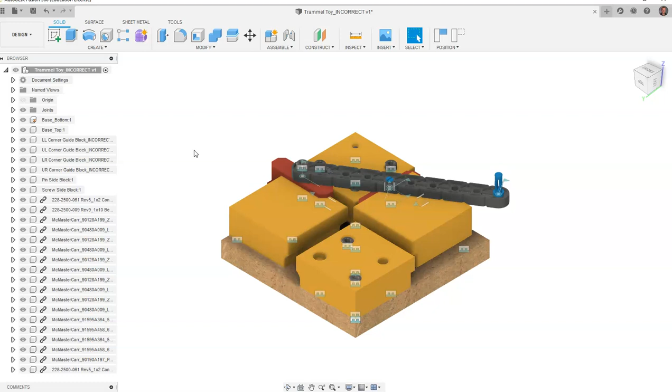In order to go in and start editing parts, we want to turn off the visibility of all our bolts and all our McMaster parts. We see bolts, hexagon nuts, dowel rods, and we want to turn off the visibility of all of those parts. We don't need to see those parts.

We're also going to turn off the visibility of our joints up here at the top, because the only thing I really need to see to edit the part are the corner blocks, and we're also going to be referencing the pin slides. For the sake of how we're going to start, we don't need to see the sliding blocks, so we're going to turn off the visibility of those.

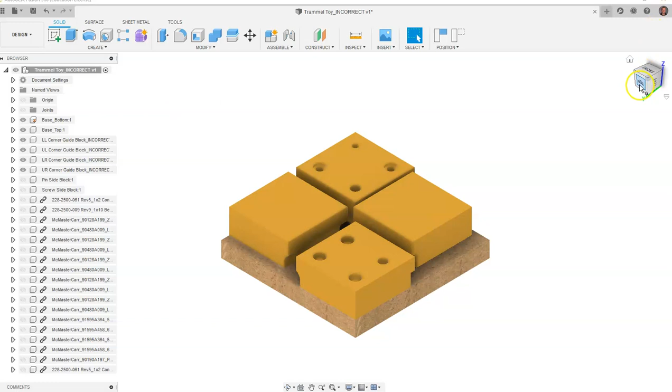We're going to take a look at our objects, and the first object we're going to look at is this corner guide piece right here that we can tell has an issue on the bottom to where it does not touch the bottom. It is perfectly constrained to a rectangular prism void here, but we need to get the bottom of this to come down and touch the object.

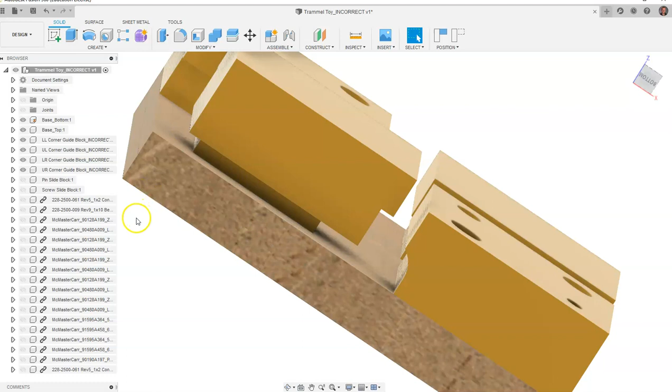So we're going to turn off the visibility of our base top and our base bottom, and turn on the actual object that we see here. I'm just going to drag my mouse over here, and we want to get a hold of the actual piece right here, which is the LL corner guide block, and I'm going to activate that component.

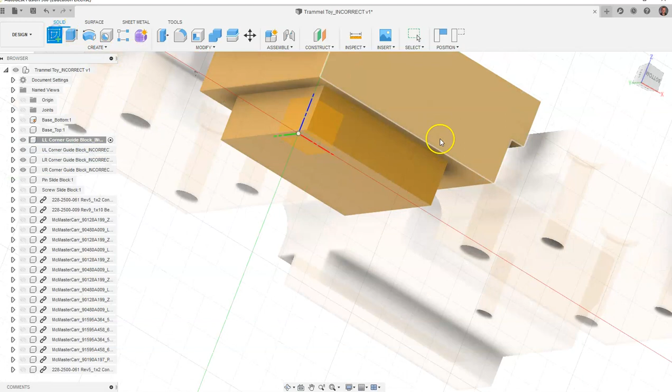We're going to use our view cube, and we want to place a new sketch on the bottom of this piece right here, and I'm going to say capture position. And it's going to flip. I'm going to hit P on my keyboard for project geometry, and I want to project both the large square and the small square, and I'm going to say OK. Then I'm going to go to finish sketch.

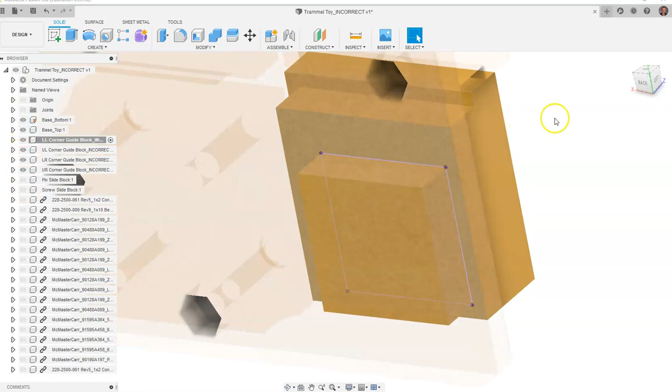We can rotate a little bit here, and I want to go back and turn on the base top and the base bottom because I wanted to be able to see the object that I was with the geometry I was projecting.

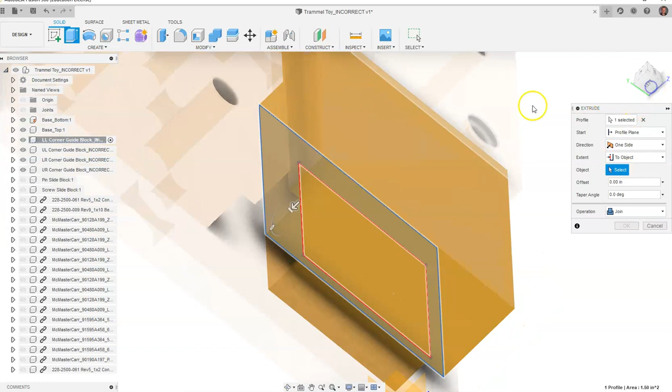Now I'm going to go to extrude, and I only want to extrude this surface here. So I'm going to have to zoom in a little bit, and this is the only surface that I want to extrude. But I want to come over to distance, and I want to go to object, and I'm going to rotate a little bit just to make sure that I can see the very top of this surface right here, because what I'm trying to do is fill in this gap in here.

So when I take a look at the side, I am filling in that gap. We're just going to say OK. And you can see how we've gone in and we've filled in that gap on the bottom now, and it's rested around that smaller square.

We're going to go to sketch again. We're going to click on the side of the object. I'm going to hit P for project geometry. I'm going to tap inside the object. I'm going to go to finish sketch.

I'm going to go to extrude. I'm going to go to distance, and go to object, and we want to go to this outside surface out here. We want to come out and meet the outside surface. I'm going to say OK.

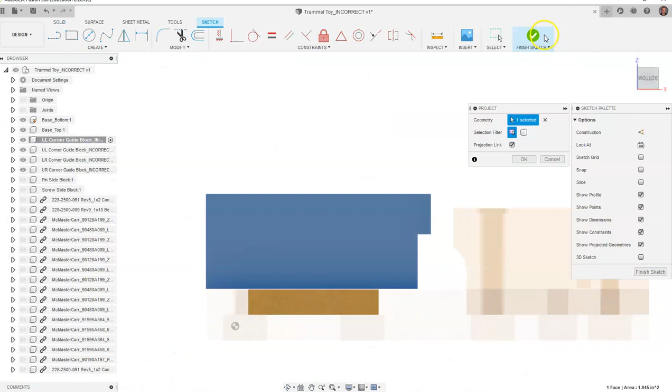We're going to go to sketch again. I'm going to click on this surface, project geometry, this surface. I'm going to finish sketch. I'm going to go to extrude, and I want it to go to an object, and I want it to come out to this outside edge. We're going to have to move our view cube just a little bit so we can see that surface. I want it to come out and meet that edge, and we say OK.

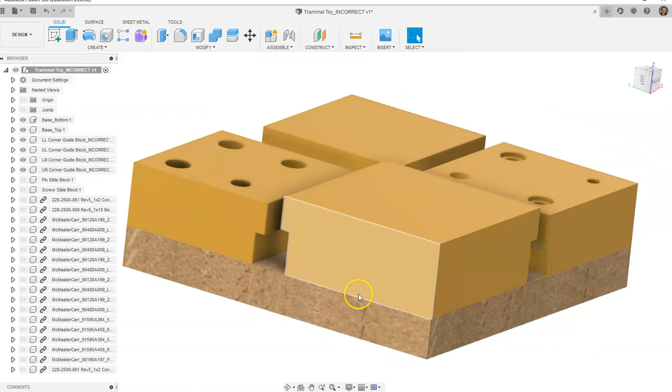Now, if I come back up and I join the larger assembly, you will now see that we have made this part to where it will come out and meet the edges. The other parts are close to meeting that edge.

We only have one other one that doesn't meet that edge. We'll get to that part next. The other issue we have to deal with this specific part is it's raised too high. It is higher than the other three parts. We need to trim off the top of this object.

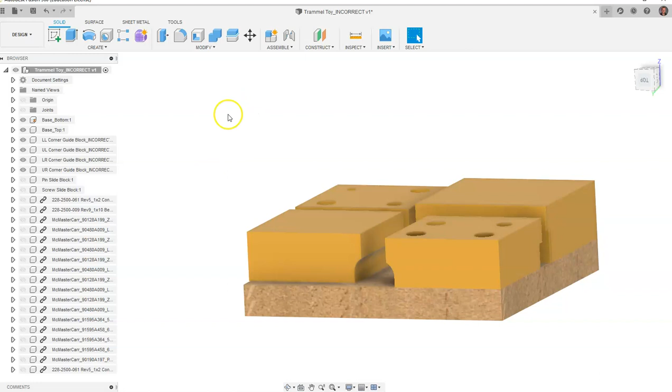So once again, we're going to go to that part, and we're going to activate it. I'm going to go create a sketch, and the surface we want to create a sketch on is right here. That's going to flip around on me. I kind of want to come back around and look at it. Sometimes you have to take your view cube and rotate until we can actually see the surface that we had clicked on. And this is the surface right here.

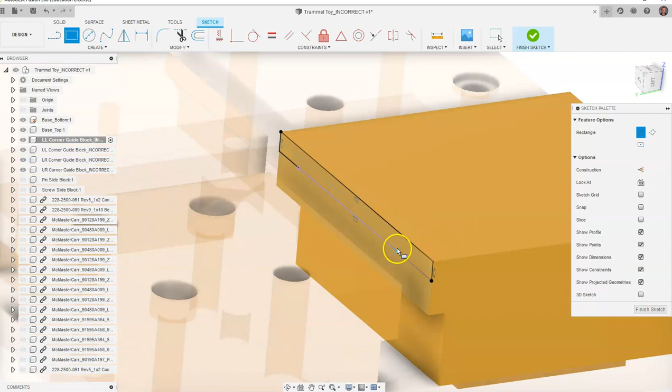I'm going to hit P for project geometry. And what I want to project in this case is this line right here. This line I want to project onto there. I'm going to grab a hold of a 2-point rectangle, and I'm going to click over here, and I'm going to try to snap up here, and it did snap. So what I'm trying to make sure of is that the surface right here that we're getting ready to cut would be coplanar with this surface, and I'll go into more of that in a second.

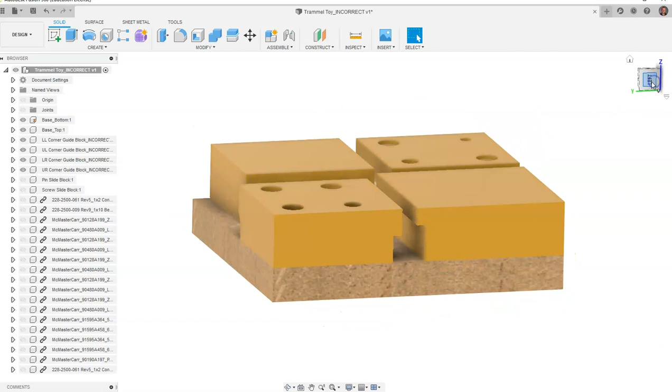We have a rectangle right here. We're going to go to finish sketch, extrude, click inside this rectangle. We're going to drag the opposite direction, and I'm going to go down to all, and I'm going to say OK. I'm going to activate our larger assembly, and you can see what I mean when I mean coplanar. That now is at the same height as the other pieces, all 4 of these are on the same plane. I could set something on top of it and it would be at a perfectly flat angle.

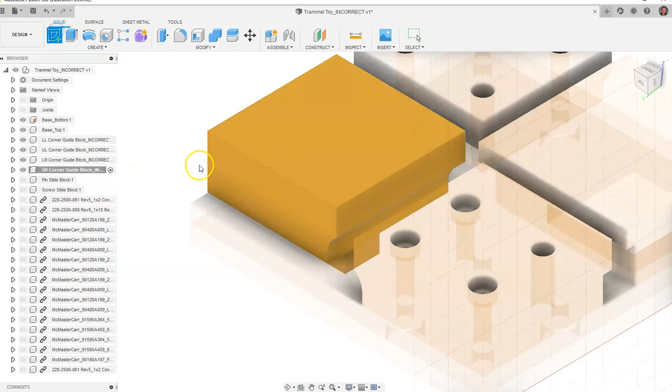Our next object that we have to edit is going to be this surface over here for this part. So we're going to drag over the top of our pieces here, and I'm going to activate this piece. We're going to grab a hold of Create Sketch. We're going to click on this side right here. I'm going to want to come back around again just to make sure I can see it. Hit P for Project Geometry, tap inside my surface, finish my sketch, go to Extrude, and we're going to go

over to Object, click on this surface here. It's going to come right out to that edge. I'm going to activate the larger assembly, and it is now flushed. It is now flush with that edge.

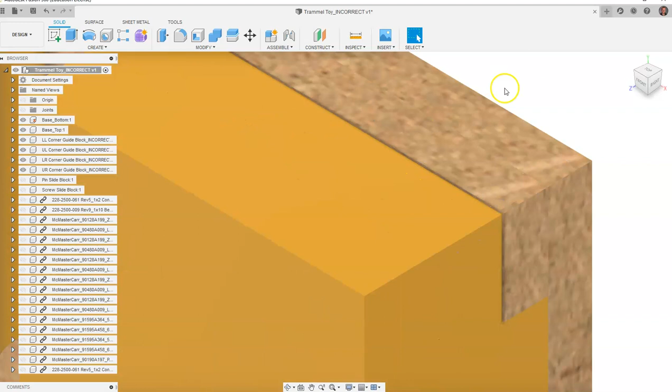If we go around to our 2-dimensional views here, we will see that we have flushed objects. We don't have anything coming out past the edge. We don't have anything that's in like a void. Now everything comes right up to the edge. Everything is constrained. And the only issue we have now is, you know, if I come back over and I

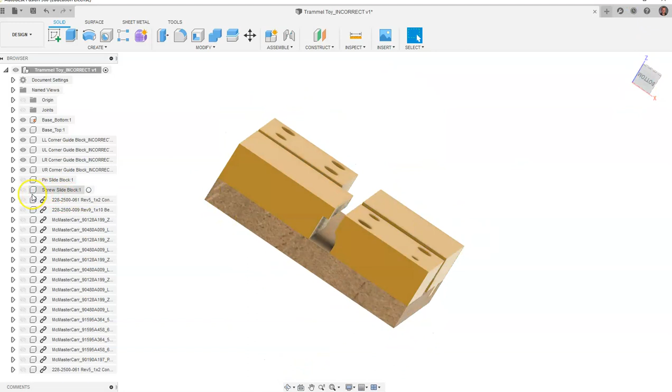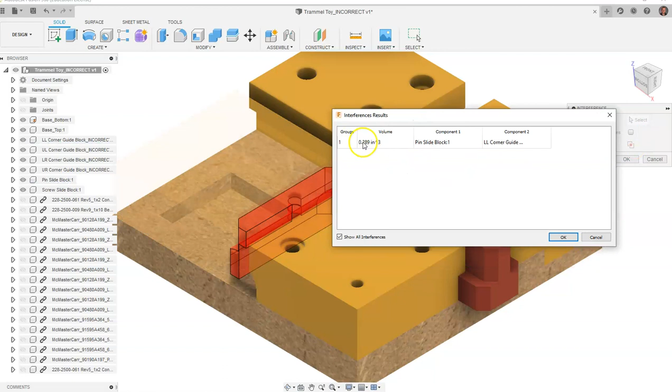turn on our pin slide blocks here, we have a lot of interference going on. And what interference means is that these red sliders are actually inside these gold blocks. And if I came up to inspect and I went to interference, I can click on this red piece and this gold piece and go to compute. And this is how much interference is going on between those two. This is how much volume is taken up by that interference. And I'm going to say OK.

So the issue that we have is we want these 2 pieces to be able to slide down through the object without any interference at all. It would be physically impossible for these things to move through because they're actually going into objects. We're going to do some things that will fix that.

So I'm going to turn off the visibility of our pin slide blocks. And I'm going to come around. And we're not going to go into any specific parts. We're just going to kind of stay in the larger assembly. And I'm going to come up to Create Sketch. And I'm going to click on one of these sides. I'm going to say Capture Position.

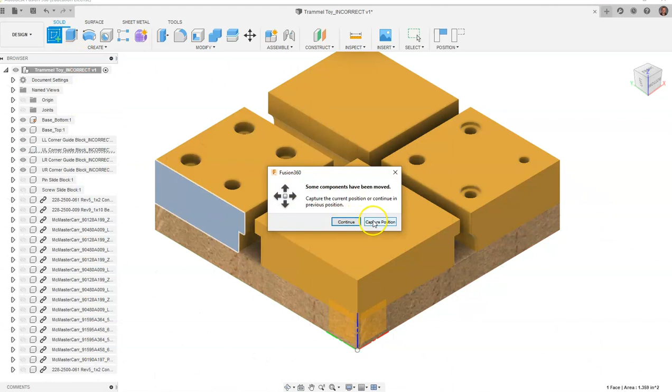And I'm going to hit P for Project Geometry. And what I want to do is I want to come in here and click on every one of these lines. It might be even easier for us if we were just a little bit more of an isometric view, maybe from this corner, something like that, to where I can say, no, I want to come in here and grab a hold of every one of these lines that I can get my hands on.

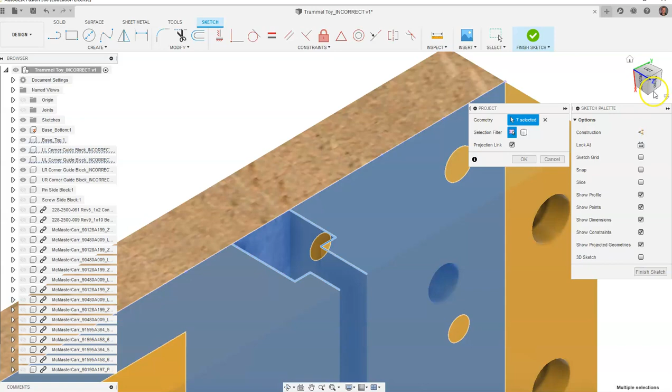Let me see if I can come around and make this a little bit easier to see. I just want to get a hold of those things. I have 7 total things selected, and I'm going to say OK there.

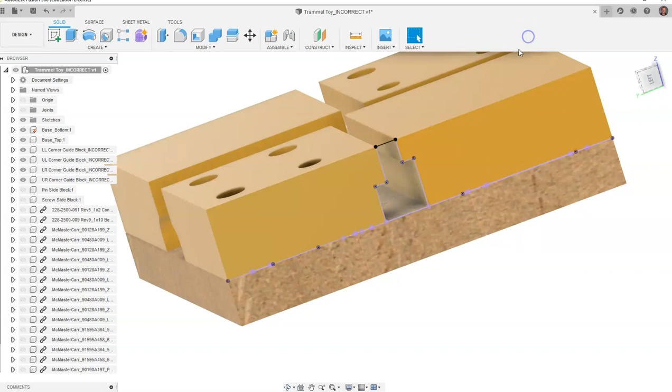Now I need to close off this profile by clicking from here to here because I didn't project anything up there on top. I do now have this surface created over here on the side, and I'm going to go to Finish Sketch.

I'm going to go to Extrude, and click inside that surface. I want to drag all the way through this object, but for distance I want to say to object, and I'm going to come over here on the other side and click here. But I don't want to cut, I want to join. I want to fill that in like I'm filling it in with Play-Doh, and I'm going to say OK.

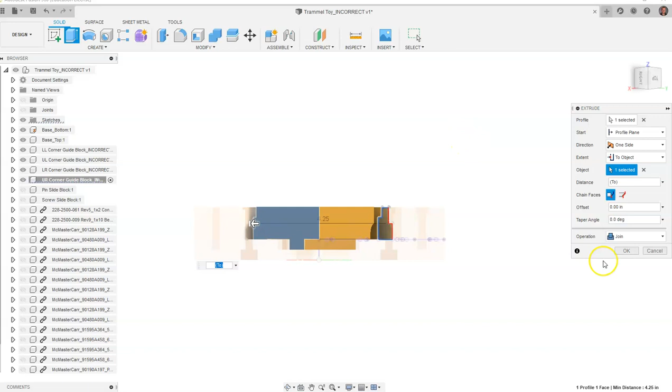And when I come back around to the other side, you're going to see this is flat. You see a little bit of an edge in here because of what we've created. It looks like that one's a little bit elevated. Maybe I clicked on something over here, or maybe I messed up with where I clicked.

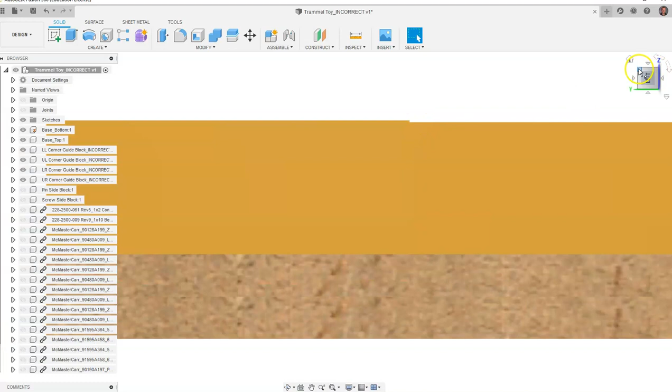But just for the sake of the video and the discussion, you can see how we've made this and how it lines up. Maybe I can come back, it looks like maybe I have a ridge here that I need to fix. Maybe I cut off a little bit too much over here, but we can always go back and fix that. To the other side, I'm going to grab a hold of my sketch.

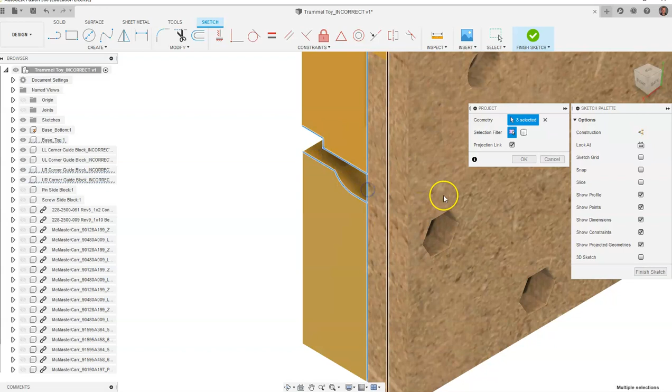I'm going to come in here. I want to come up to the top right when we take a look at this. P for Project Geometry, I'm going to go ahead and project. I'm going to go ahead and project these lines. Let's go ahead and project down here. It looks like I do have that nice and lined up.

I do need to grab a hold of my pencil. I'm going to come into here and I'm going to play. Oh, it looks like that's at a weird angle there, doesn't it? It looks like it is raised up a little bit. It's not really going to hurt.

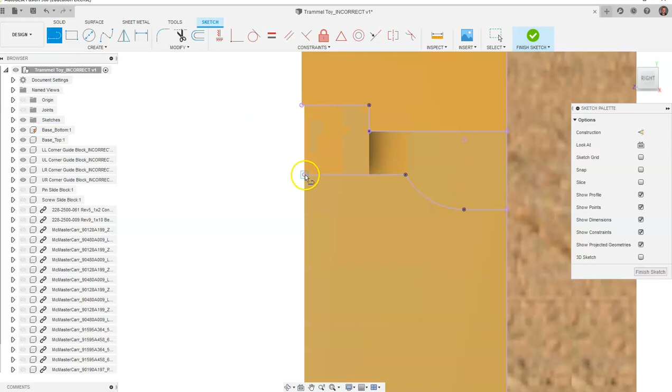I guess I do need to come in and delete this line just for now. Let's delete this line. And I'm going to grab a hold of a line. I just want to draw straight across here. Grab a hold of the trim command. I'm going to trim that off.

If I have anything that's going on up here for a ridge, if I made a mistake, I can go back and fix that later. I'll wait until the end of the video to fix that. And I'm going to go ahead and just say Finish Sketch.

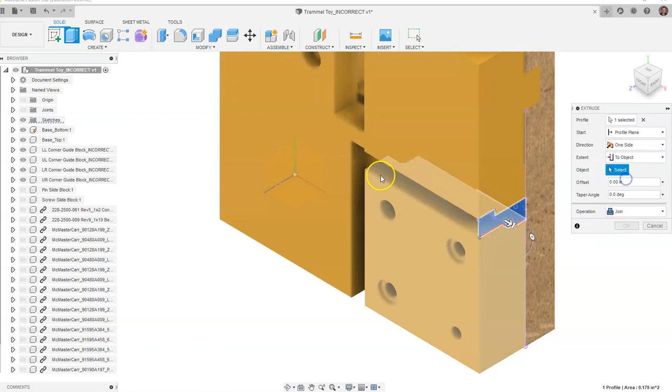We're going to come in and go to Extrude, and I'm just going to extrude that. For this case, I can go ahead and say Distance and go to Object. I'm going to say, just go hit this wall for me. And I'm going to say Join, and I'm going to say OK.

Now it looks like there's a little bit of something going on in here. Maybe I missed something. I can fix that from this other side. And from the other side, I'm going to come right in here, and I'm going to go to Pencil.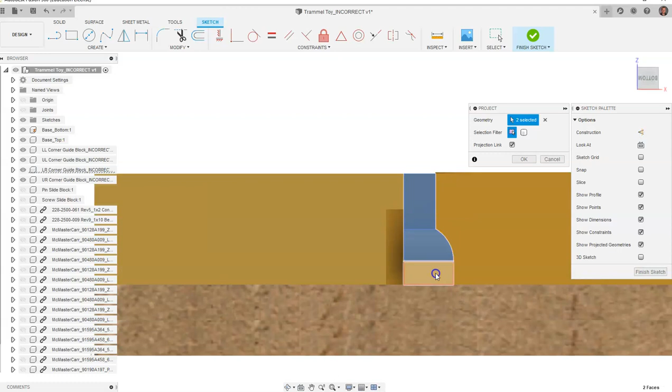I'm going to click on this side, and once again, Project Geometry. You guessed it, come right in here. I'm going to click on these surfaces if I can. Click on this line, this line. I got a line down here. Let's get ourselves a line up here.

I'm going to rotate this around. I got 7 different things selected in here. Let's go to OK. Let's go to Finish Sketch. Extrude. I'm going to click inside of each one of these profiles.

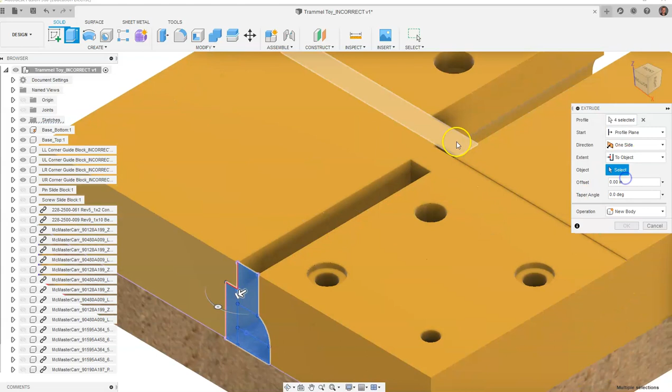I'm going to go to distance, to object. I'm going to zoom in. I'm going to click on that surface. I want to go all the way, hit that, and I'm going to say join. I'm going to say OK.

Now it looks like I made a mistake. So while I'm here, I kind of want to come in and see this mistake that I made because this has been bugging me. Looks like I raised up that ridge too much.

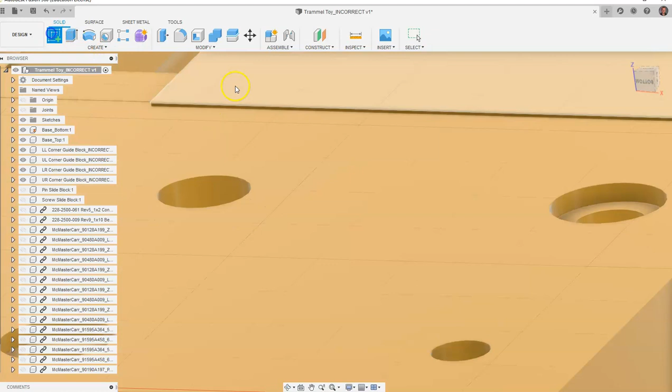I don't know if there's a ridge out over here, maybe I missed some small part. I need to come in and click on that edge because this is driving me crazy. I made one small mistake. If you didn't make the same mistake, well played, but I did, and I need to click on this surface if I can.

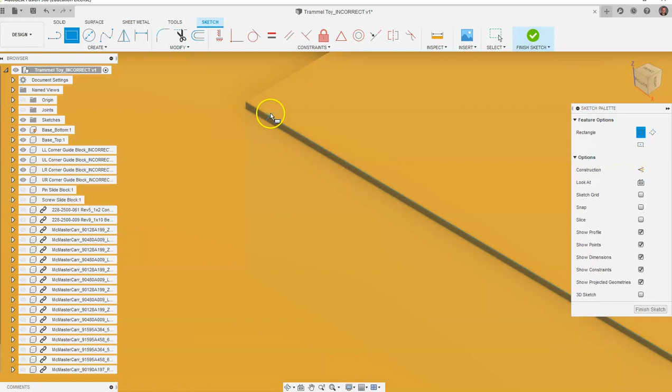I'll tap out here and do a quick cut, escaping twice on my keyboard. I'll grab a 2-point rectangle and click on this corner, then drag all the way down to this corner down here, see if it'll snap. It doesn't want to snap, so I'll have to project this to get that corner. I'll say OK.

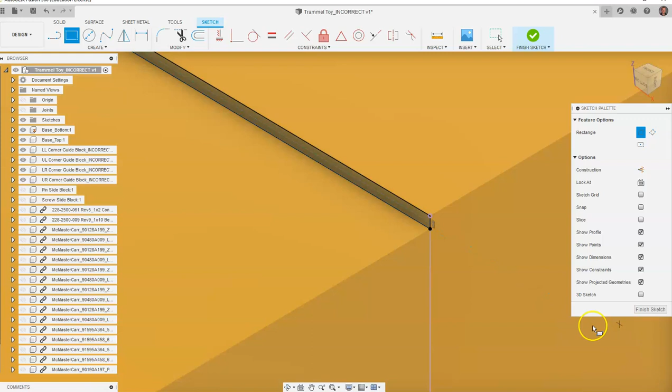Now let's come up to 2-point rectangle. I'll click on that edge up there and drag down over to here, making sure that snaps there. Finish sketch, extrude inside that surface. I'm going to cut all the way through just for the sake of the video, and go ahead and say OK.

I'll let off, and you can see now the little ridges from the geometry we made, but those aren't really ridges as far as height goes. Those are just there for appearance.

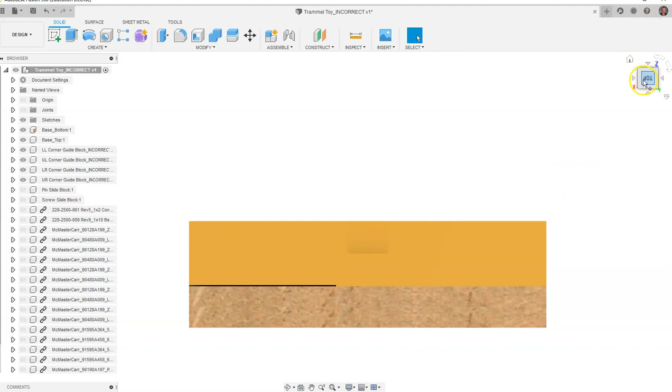I'll go ahead and click on create sketch, then click on this edge over here. I want to flip this around so I can look at it. Pressing P for project geometry, I'll click on each one of these edges. Click on this line, grab the line command, and we should go straight across — that'll snap nice and even.

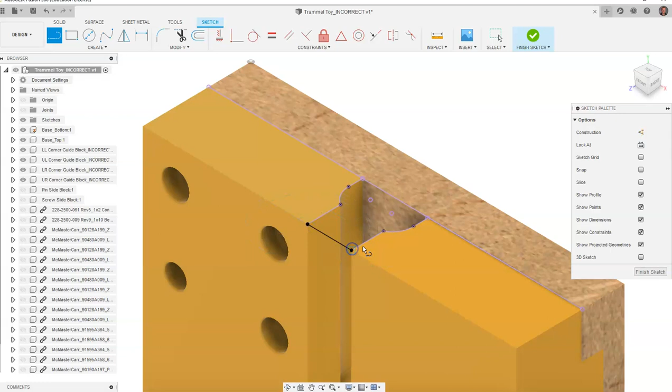I'll say OK, go to extrude, and click inside this object. For some reason it doesn't want to see that object, though, does it? We go to extrude and it's seeing something else over here, so I need to go back and undo.

Let's see what happened here. It looks like it's only seeing this surface over here. So I'll grab my line command and just make sure we can see this, and I'll have to use the arc command here in a second. I'll just go ahead and draw my lines over the top. Sometimes when you project geometry, it might not see everything you're wanting it to see.

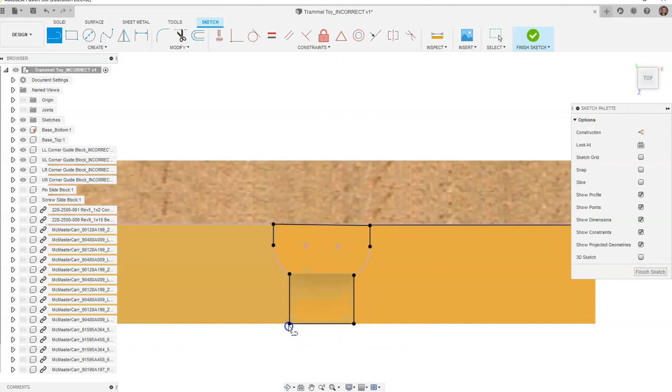I'll go down to arc and grab hold of 3-point arc, clicking here, here, and seeing if I can get this thing to snap there. I'll go to here, and we're going to snap that into place right there.

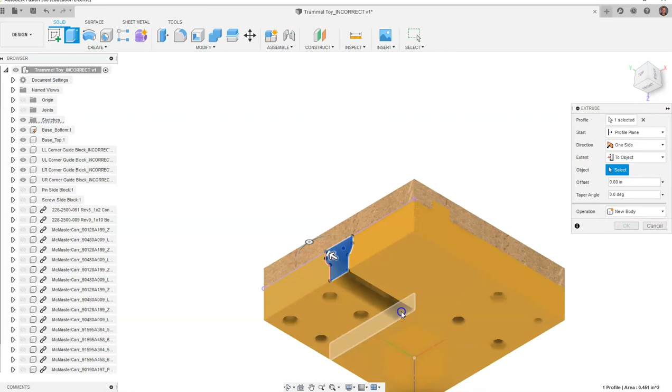Finish sketch, move this a little bit, extrude. I'll click inside this surface, and I need to see what surface it's going to go to. I'll go distance, go to object, click back here, go to cut, go to join, and say OK.

You're going to see now we have our object. I'll flip this around so we can see it on the flat here. Every void is now filled in.

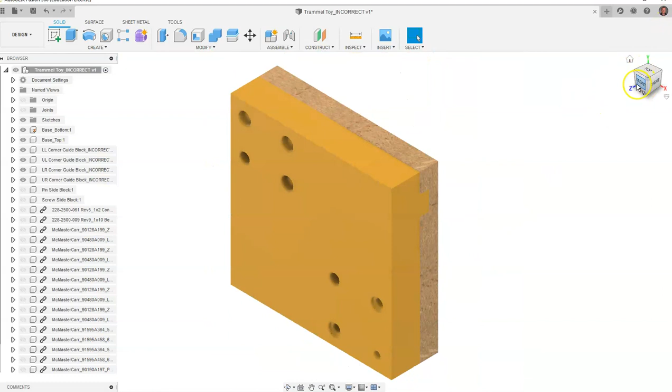Looks like we just have a flat surface here. What's nice about this, there's some small edge over here that I may have missed. This is really small, I can go back and fix that — it's kind of a small detail. When you're designing things quickly, sometimes those little small things will change. That's something I can do outside of the video, but you get the idea of where I was headed.

What we need to do next is turn back on the pin slide blocks, and I'll go ahead and drag these out. I'll keep one of them out, so I'm going to keep just this one out for now.

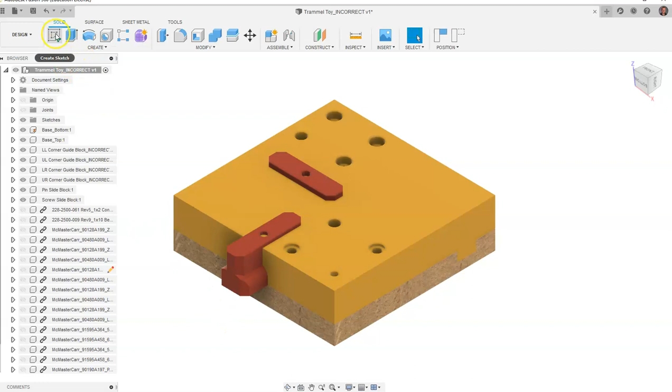We're going to come up and click on create sketch. We'll just click on one of the gold sides here. I'll go to capture position, then go with P for project geometry. What I want is every one of these surfaces.

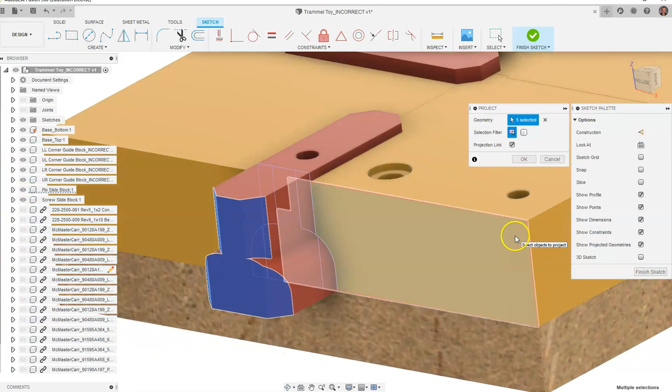Every one of these surfaces, make sure I got each one of them. If I turn my view cube, it will have projected it onto that surface. I'm going to go ahead and say OK, and turn off the visibility of that slider.

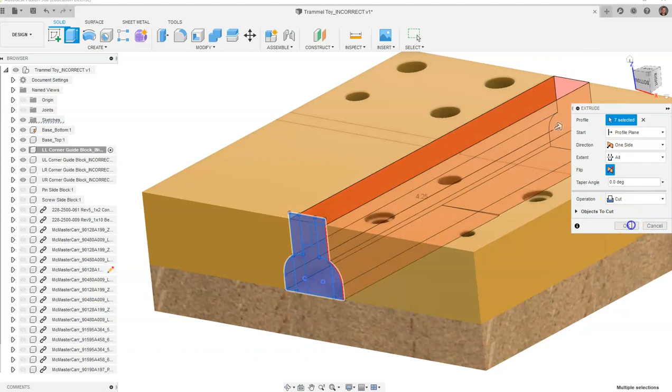Finish sketch, extrude. I'm going to click inside each of the surfaces I just cut, inside each one, and drag all the way through the object. We are in cut, going to all. Say OK. We've cut through there. Turn on the visibility of the other slider.

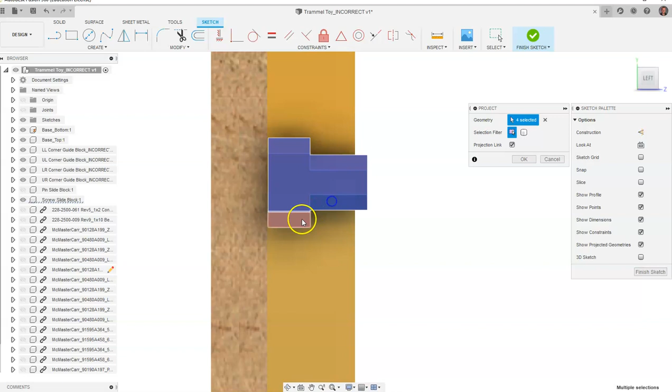I'm going to drag it out to here, this side for this case. Create sketch, side of the object, capture position, P for project geometry. I'm going to project the geometry of every surface right here. Finish my sketch, and I'm also going to turn off the visibility of this slide block.

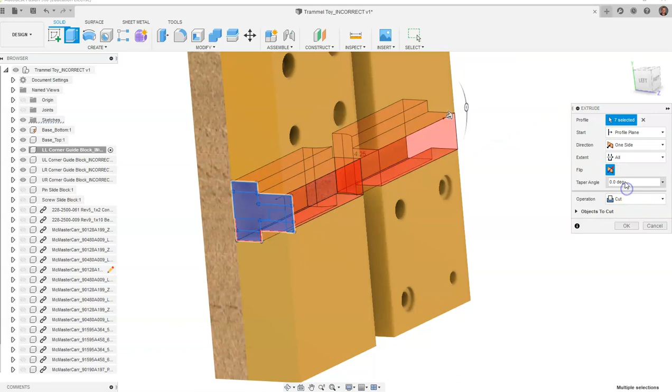Extrude inside each one of my surfaces. I'm going to click, and I want to drag all the way through the object. I'm just going to go distance, go to all for cut. Say OK. Let's go to our house button.

Now it looks like somewhere in here I missed some very small sliver to cut. Looks like there's this little tiny sliver in here.

So just while I'm here, I can go in, and I can say when I was projecting geometry I got a little too click happy, and I'm just saying whoops, did not mean to do that. I'm going to come up here and grab a hold of the line command.

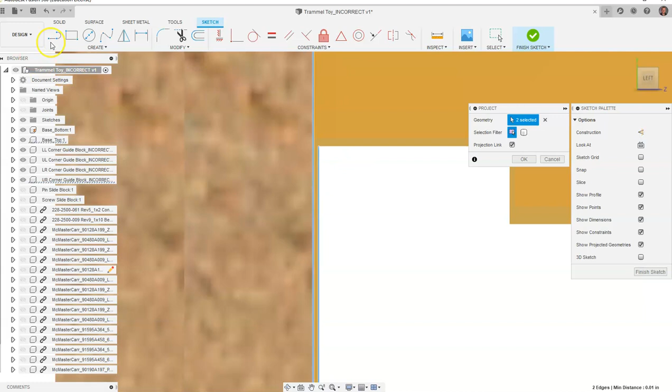I like going all the way through and then trimming off things because I have a guarantee that it touches. So instead of trying to be perfect and snap it, it looks like I didn't project this over here. I'm going to go to project and make sure I project this too.

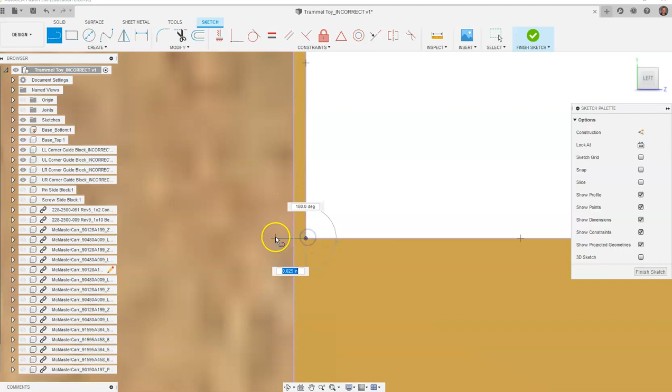Let's say okay, I got to go to my line command. I'm a fan of doing this - I like to go all the way through lines, grab a hold of my trim command, and just trim that off. I have a guarantee now.

So now I'm going to go to finish sketch. I'm going to have to zoom in on this when I go to extrude. I'm going to come in and I want that, and I want that, and cut all the way through the object.

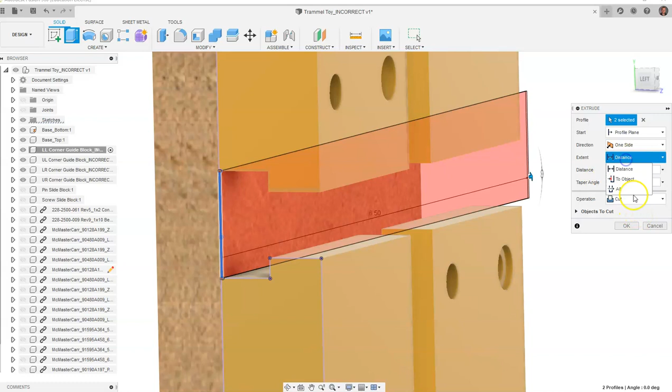I made a mistake, I'm going to come in here and go all the way through the object. It automatically goes to cut, I'm just going to go to all. Say okay. And now I have actually fixed that problem.

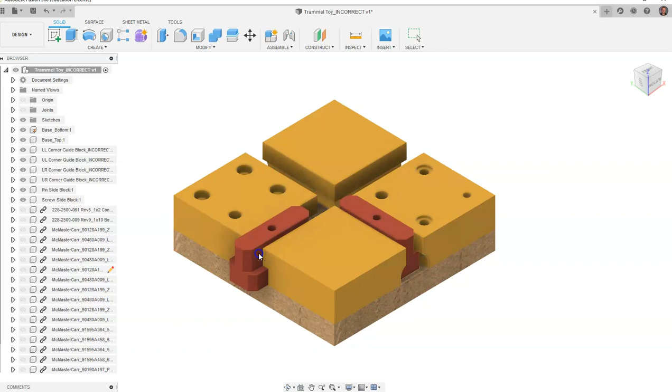Now there might be a few other small tweaks here and there, but if I come in and turn on my pin, slide block, and all of these things, and could turn on that arm if I wanted to, but we don't really need to. You're just going to notice now when I go through, there should be zero interference. I can know that by coming up to Inspect and going to Interference.

Say capture position is fine. Between here and here, is there any interference? Calculate - no interference detected. Let's get rid of those faces.

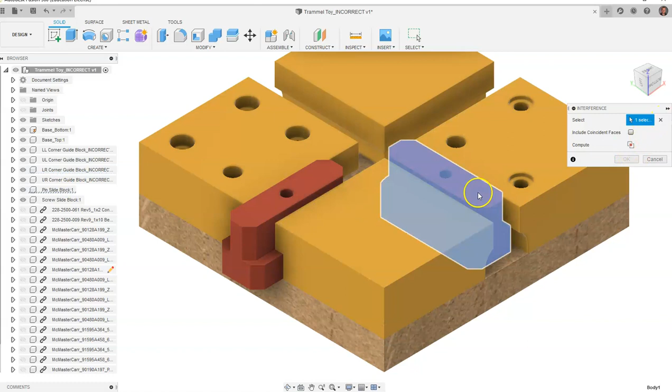Select between here and here - is there any interference? No interference. Let's get out of there. Let's look at this one over here. Between here and here, no interference detected. That's what you want. So between here and here, any interference? No interference detected. So this is one of the ways that you go about solving this problem.

Now the bolts in this object have a lot of problems with them as well. So if I went in and turned on all these bolts, I can still - here's our arm, we can turn this around. So it's a nice little project to do.

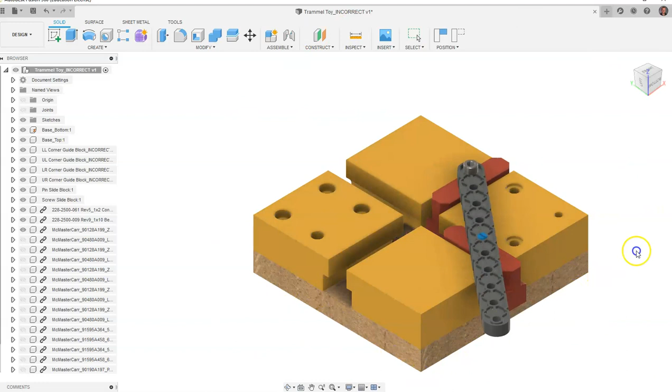The bolts in this project have a lot of problems, and I did not fix any of the bolts. So in another video I will go in and show how to fix the holes, the bolts, and the nuts and the pin issues that are going on with this. Because if I turn off these blocks, we can go in and actually see a lot of these bolts and screws and the issues that they have.

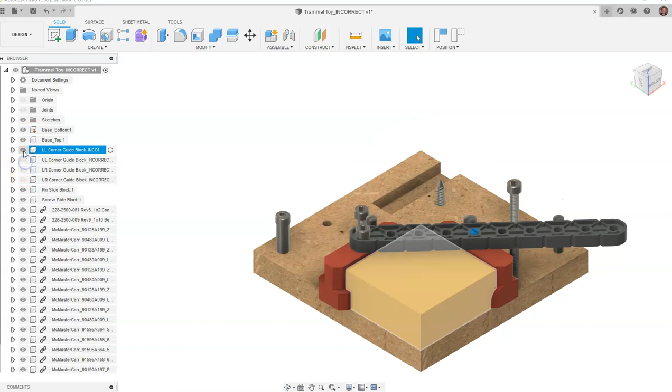So this has been a video on how to go about fixing the corner block pieces for the Trammel toy, in order to correct the issues that existed with the one that we had loaded, so we can now 3D print this object and have it 3D printed correctly.